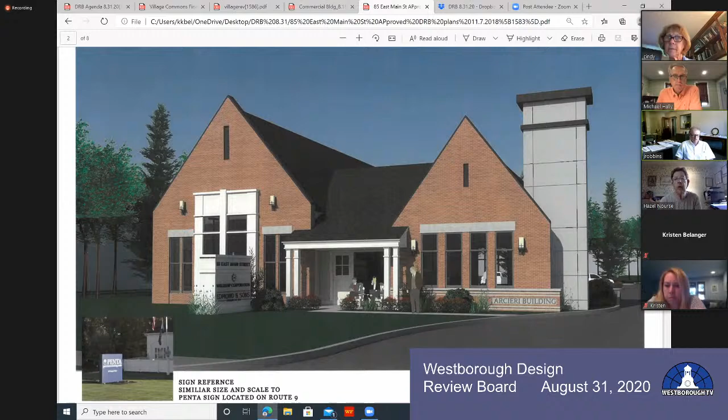Are those the only changes, Jim? No, I don't know, probably Kristen doesn't have my memo. There were multiple changes. I can read them to the board. So we should include them in any motion we make, shouldn't we? It's going to have to list every single one of the changes.

Smook Architects got back to me by email, said they wouldn't be ready for today. I was kind of surprised someone came in after the end of business on Friday and asked to be on the agenda. The agenda is actually closed, but I put them on in advance thinking there might be an opportunity for them to be ready. So I understand Eric Gilmore or someone representing Smook Architects or the engineers wants to speak to the board.

So you're looking at the front elevation. On the front elevation, we're talking about the two louvers in the gabled end. The entryway door you see is a divided light, 1/1 here, 4 lights in the door. The door that was installed is solid, so there are no lights. The trim on the main windows to the left on the elevation are supposed to have white trim between the top transom window and the main windows. In the field, it's actually all brown. The casing is white as shown, but the trim around the windows is brown instead of white.

On the other elevations, on the north elevation, which is facing the woods, there is a similar issue with the trim color not being white, but rather being brown. The last set of windows on the side before the garage, the 2 windows side by side, not that one, the next one to the right, Kristen, that's been replaced with a door that might be for access to a mechanical room. On the elevation above, which is the south elevation, let's see.

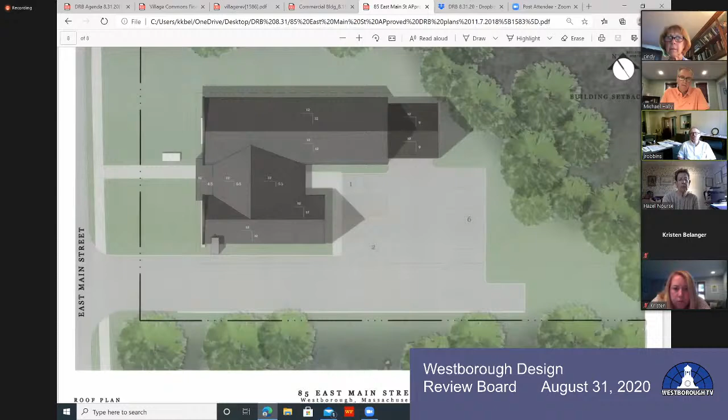elevation, you're going to see when Kristen gets there that there are 2 vents that are supposed to be louvered. They are as shown on the plan right here. So the 2 gabled end vents are solid. They're not louvered as shown in the specification on note number 3.

The trim color is also different on the windows again. These are not major things. They're easily changed on the plan. The windows in the door swap, I'm assuming, is a request of the fire department because it looks like it's a mechanical room. If that's the case, I'm certainly not going to have a problem with that.

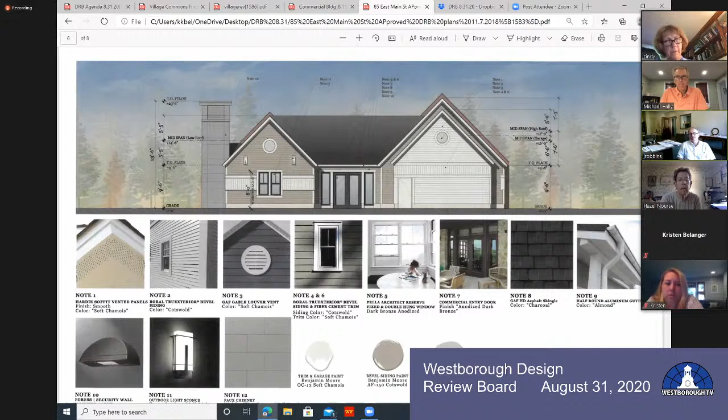Could I say something? This is Lou Amarati from Gilmore Building Company. Yes, please, Lou. On the front door of the building where it shows the residential style half-light door, that actually was replaced with a full light door. It's a door with no panels in it. So it's sort of keeping in line with the big window that's right next to it. I have a picture of it, if Kristen can throw those pictures up that I sent over.

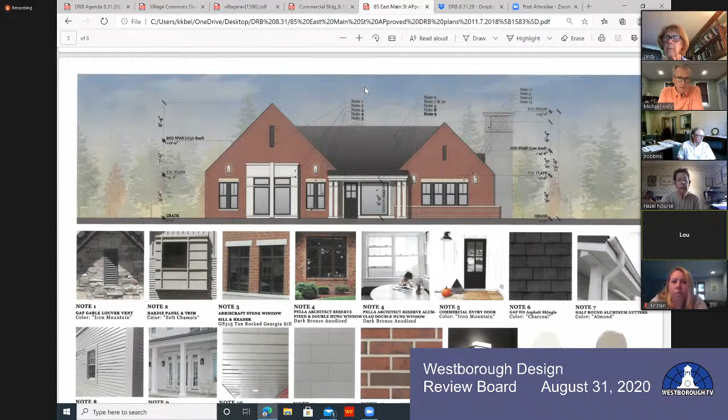I stopped sharing, so you can go ahead. Can you go ahead and share from your end? Okay.

Lou, can you also explain why you made the changes? Yeah. So let me just focus on this, I have a close-up of this as well. So here's the front entrance. And the problem is that we were having a difficult time finding commercial hardware that would work on a residential style door. And when we brought this to the architect's attention, he agreed to allow us to make the change to a door style that was consistent with the other doors on the back side of the building.

So there are no lights, just it's one glass panel, Lou? Full glass panel, yep. And if we take a look at the back of the building, that's the same doors that you see here.

Now, can you see into the building through those doors? You can, yep. I'm a little surprised, actually, for safety's sake, that you would have full glass doors on a commercial building. These doors only enter into a vestibule area. You open up these doors, you enter into a small lobby. On the back of the building, you already have these two big side lights next to the doors. And then on the front of the building, the fact that there's a giant window right next to the door, I don't think really makes much of a difference in terms of having the front door be a partial or a solid panel door from a security standpoint.

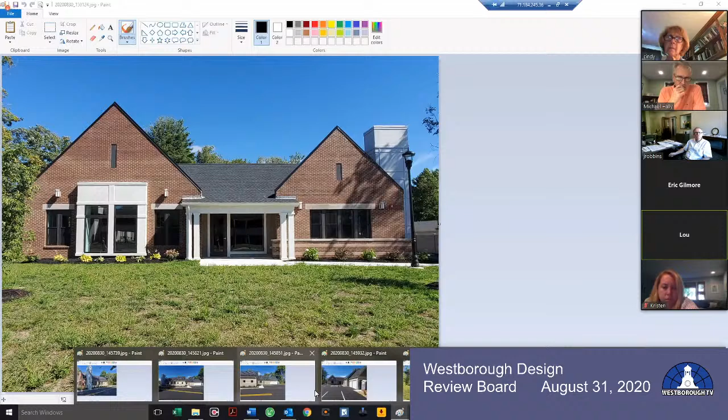Lou, can you explain why the doors were substituted in place of the windows? There actually was only one door that was replacing a window, and that was right here. On the other side of the building, let me get to it—there were no windows that were replaced with doors on this side. Okay, my mistake, you're correct. So the one door we did have to put in here was deemed a requirement for egress purposes when the interior of the building was finally designed.

Why the change in the window next to the door, to the left of the door? Right here? Yes. If you look at the elevation that was approved, they're double hung windows similar to the other side of the elevation—if you can show the elevation. That was for a utility room to go in there. I thought so, okay. Yeah.

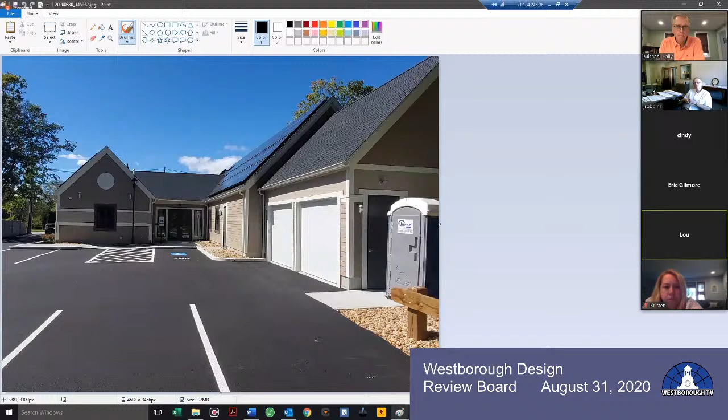And the door on the rear of the building where the porta potty is—is that because building code requires a door outside the garage? That's right. So for the board's information, on the original approved elevation for the rear, there was no door where the porta potty is, but I understand building code required it. And then further down to the left of the garage door, you can see the second means of egress that was required.

Why the removal of the louvers, or the different door on the garage? The garage doors themselves, yeah. Well, this is where a potential security issue did come to mind. With having glass windows in the garage doors, the building owner felt it was more appropriate that they be solid doors rather than have glass in them.

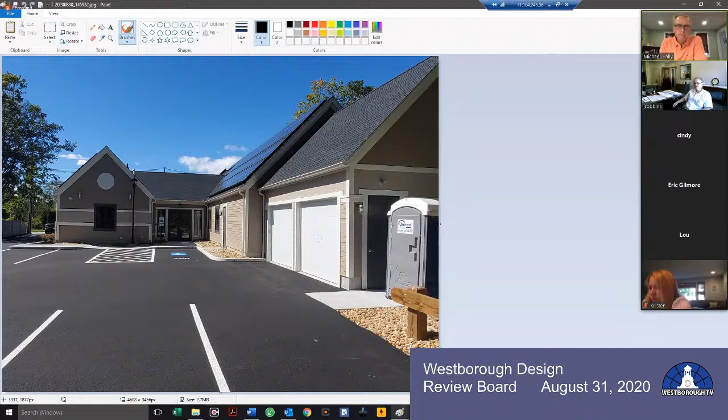Are those doors panelized, or are they just flat? Whoops, there we go—can you see that a little better? Yeah, they're flat panel doors. And they're a different color. The design drawings had a brownish neutral color, and they were panelized. Is that accurate? Yeah, they looked like a carriage house style door.

Lou, the design review regulations are trying to make buildings in this district look residential because this is the gateway district. I recognize the purpose is for commercial use, but the design is intended to be a transition between residential and commercial as you enter downtown. Across the street, the doctors' offices and the hair salon are all residential in nature, so most of these changes made to this building were commercial changes. The board needs to recognize that when they approve these. In the future, let your architect know, and I'm letting you know, Lou, that you can't make these changes in the field without pre-approval by the design review board.

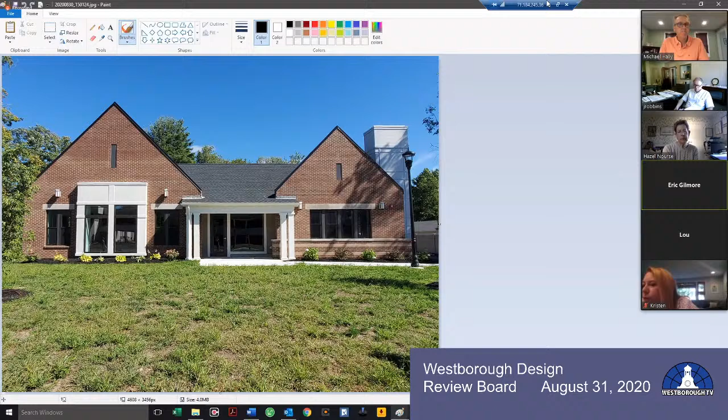Through the chairman, Jamal just texted me and said he waited till 9 o'clock. He had to go to another meeting, so he left. But he said if you need him, he will be back after 9:30. Okay, if you need him. Keep going, and we'll make a list for him if we have questions. Okay, perfect, that's fine.

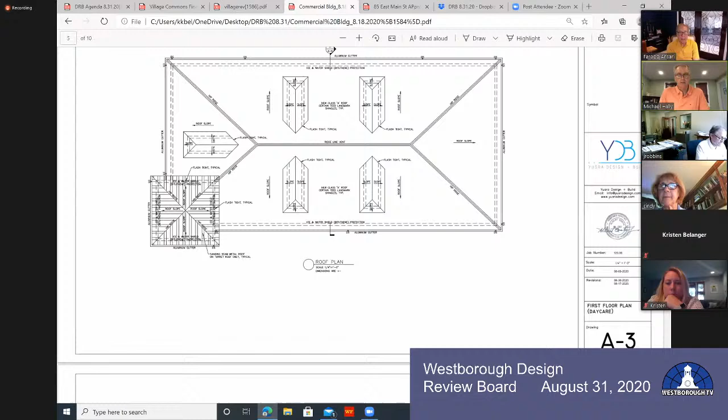What do we want to talk about first? You want to talk about the commercial building? Let's do the commercial building first, then the garage or summer house, and then the residential.

Is it my turn to speak? Yes, please, Farouk. The last direction you gave to Jamal was to give the stone lining at the bottom of the building all the way around rather than just the 2 sides, and also all the way down to the grade. That was the only comment. So he did do that. It's all on 4 sides now.

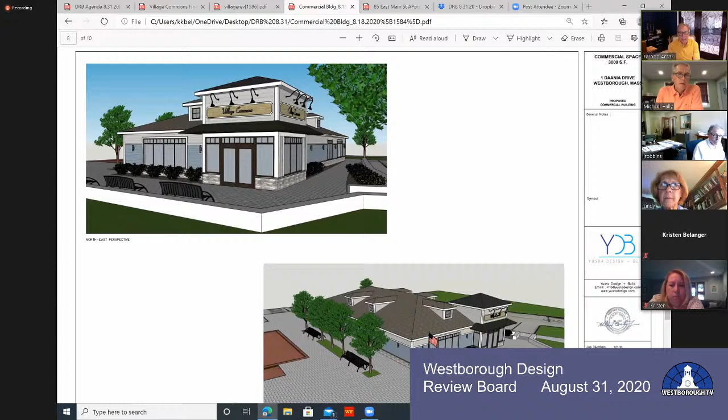If you show that, the MP4. And we have the 2 sidings as we discussed before. Yes, you can see clearly they got 2 different sidings there. Okay.

You can't run the video, huh? The MP4? I saw the last video, Farouk, it was very nice. Okay, thank you. We did see it. Did we also add the lights along the building? I don't remember those, I like those. Yep, I think somebody must have told him, and he did add that, and also provided the cut sheet for the loop awning lights.

So it's complete. Anybody, Hazel or Cindy? If we approve this building as such, are we also approving the sign, or can that come later? I assume that's a placeholder. The lights we are approving, but not the sign. Okay, thank you, that's your intention, Farouk, correct? That is correct. It's just to show where the sign will go, but we don't know what that's going to be. Yeah, I like the lights. They'd have to come back for the signage. Okay, correct, thank you.

And can we see the spec on the lights? Is that close by, Kristen? One second, Michael. For the record, Kristen, would you note that Farouk acknowledged he needed to come back for the sign? Yes.

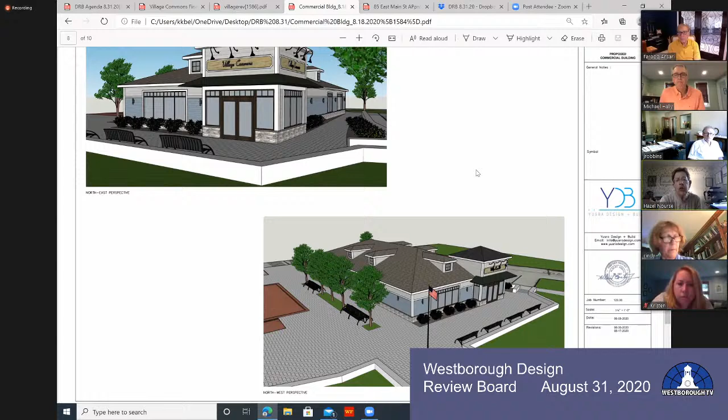Jim, is it worthwhile, I mean, one of the problems we've had all the way along is that the architectural renderings don't look like what the buildings end up looking like. And then the contractor comes in, sometimes looks at the architectural renderings, fails to look at the plans themselves. This is where we seem to have had a disconnect. Is there some way we can do something about that? Because that was the problem we had all the way along.

Sure, so the board approves plans that are dated and each plan sheet is numbered. The renderings are not— I take that back, the renderings are numbered, but we're not approving the renderings. You can make it specific in your vote that you're approving the plan specifications dated and numbered the following. And when you get to that point, I'll do a motion for you. Okay, so that's thank you.

But it's Farouk's responsibility to either be a project manager or get a project manager that makes this clear to the builder, to the contractor. It's totally Farouk's responsibility. The buck stops with him. Right.

But that's the problem we had with the residential. So many times we had those renderings and they were not connected to the plans. That's because he built the color rendering, he didn't build the specifications. I don't even know, Farouk, if you knew you had specifications, but it was your responsibility to get those from the developer who had them approved.

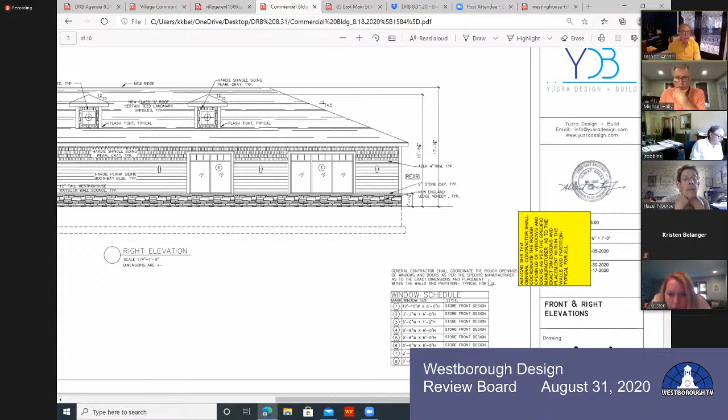We need a spec. No, the manufacturer is United, it says it on the elevation. Where? If you go in front of it, it says- I just saw that, I just read it. Can you move it? Doesn't that say it in the plans? No, in the plans I'm saying it does say that. It says fixed window by United, typical. Yeah, right there.

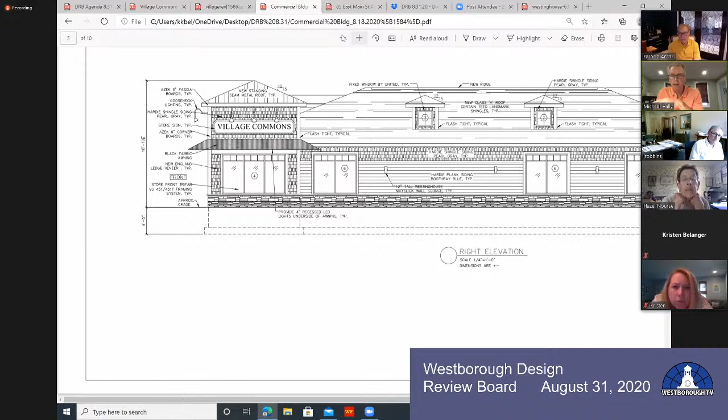If you have it... You see that, fixed window by United? Yeah, but it doesn't have... if you don't have it in the specs, we don't know the size of it. There's nothing there that tells us. It can go to the specs, please. The window schedule gives us the size, and the callout says window. Okay, it gives the size.

See, it's fixed, number 7, 2 feet 4 inches by 2 feet 4 inches square. And do the lower windows?

I know the storefront windows on the lower level, are those all by United, or is that different? No, those are by different people. The specs are all given. I had provided that earlier, and I think it's on here too.

We need one set of plans, Farouk. No, this is all there. See the storefront design, that's the name of the company that does that.

Kristen, can you move the drawing to the left a little? I think there's a callout at the windows below the Village Commons tower. It's all there. Storefront. Yes, right there. All the specifications are given, the manufacturer is given, everything is given.

And I assume all the window frames are black, is that correct? Correct. Is that called out someplace? They only come in black. Well, then you better tell us that they're black. I thought it said there somewhere. It was black, I think shown in the rendering too. It's the rendering though that we're not paying attention to. Yeah, that's okay, I'll ask Jamal. Maybe he has added it somewhere. If not, then we can put the word black there.

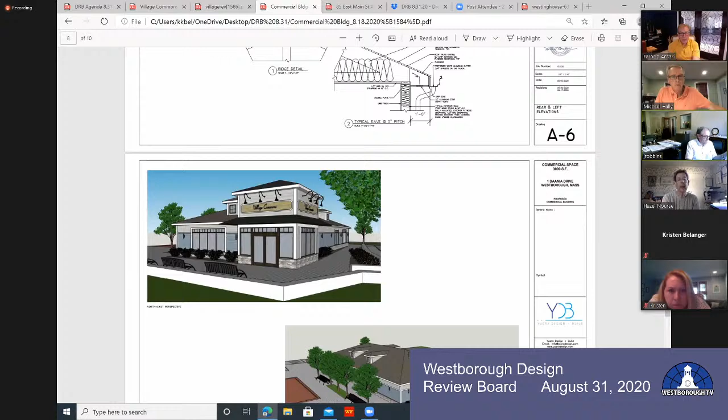Can we just go to that other light we just were showing to Mike? I don't think we've ever seen anything about the lights, Michael, have we? I don't know, I've seen it, I can't remember, I've seen the goosenecks a lot. I thought it was in the last package. Yes, it was, yes it was. So, oh, you want to see the side lights, Jim?

Is that what you asked for? Yeah, we just saw that a minute ago. Yeah, it was, we had a cut sheet. Where'd that go, Kristen, is that in there somewhere? So I see a Mayslick light. Yeah, there we go, right here. Yep, okay. Do you have the same for the gooseneck?

Yes, same exact sheet but a different kind of light. But I'm looking at my phone here to see if I get it. That was submitted earlier, the one before this that was given as a separate thing. Okay, no more separate submissions, we need one set of plans.

Yeah, grief. Is there another light below the awnings? Is there something? Yes, there was also submitted. Okay, I'm looking.

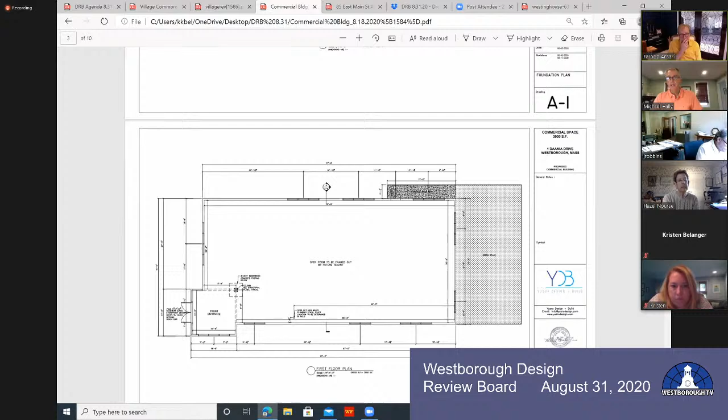All right, as soon as I get the file in my email, I'll pull it up. What did you want to see, Hazel, in the meantime? Oh, that's fine, I just wanted to go back to these so I could look at these again. Okay, not a problem, all right, as soon as they come in my inbox, I'll pull up those specs for the gooseneck.

And there was a third type of light, is that correct Michael? Is there a third type? Yeah, so there's a light under the awning, the fabric awning at the tower, I believe. Right. So we should have the specs for that also. Yes, that was also submitted.

Where is this submittal? I don't have a paper copy. I sent that to Kristen. This was sent earlier in the process. Okay, so I have a file on the network with this that I could print out.

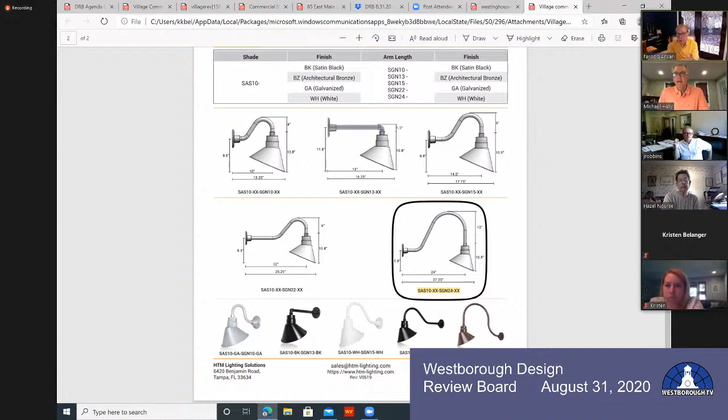Well, the only thing that's lacking is this number is not specified on the new plan, right? But otherwise, everything she's spec'd it all out. Yeah, just on that sheet, correct, that's the spec right there. So what we're telling you, that's a problem, it has to be extremely specific. I don't know if he has even put that down in there or not.

Was there any spec for the other light, Michael, the one under the awning? We haven't seen anything on that yet. Yeah, there's a picture of that too. There's a cut sheet of that too. Was that in a previous submittal? Yes, it was the one before this one.

We need one set of plans. You may think it's redundant, but we need one set of plans, because when the inspector goes in the field, whether it's me or Bill or Fred, they need to know what they're looking at. They're going to take one set of plans.

Let me, so Kristen, is it easy for you to look in that last submittal where the gooseneck spec was? That looked like one email, so she's probably going to have to go back through her emails to see that she can figure out which one it was.

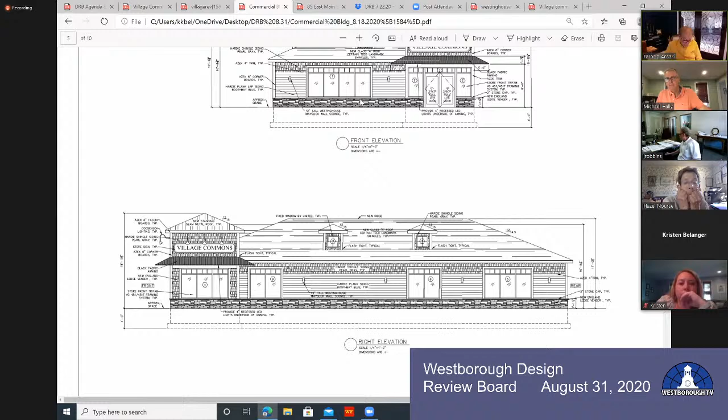Okay, when something says on those plans, 'flash tight typical' - Michael, what does that mean? It means that they're all the same, assuming a spec is listed somewhere on the plans.

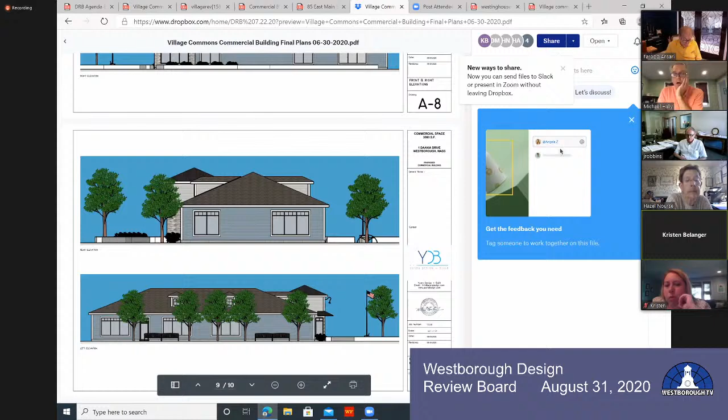We don't have them as part of this commercial building file. I just texted him to send it to me again. So that light, I assume, is an LED of some sort - yes, it is. It's a round puck light, they call it puck lights. Okay, yeah, that's what was submitted.

Okay, let's get this commercial building - I think if I can speak for the board, we're generally pleased with the finishes and textures and the light. As soon as we have the lighting specs and get the specs clearer on the windows, the black finish, I think we're pretty good on this.

I'm not sure if you listed the color of the standing seam metal roof on this - it doesn't give us a color. Colors are just as important as the manufacturer. Even the wall lights, I'm not sure they say black on them. All the colors on the lights and the light specs are just as important. But I think the stone looks good, all the trim looks good, and we need it all wrapped up. We can't give you approval till it's wrapped up.

Michael, on the plan we're looking at, the front elevation just says 'new standing seam metal roof type.' Aren't those the kinds of things that have to be specific as to what they are on the plans? Is that correct? That is correct. So we need the manufacturer on that, and certainly the color. We know it's standing seam, and so that would be...

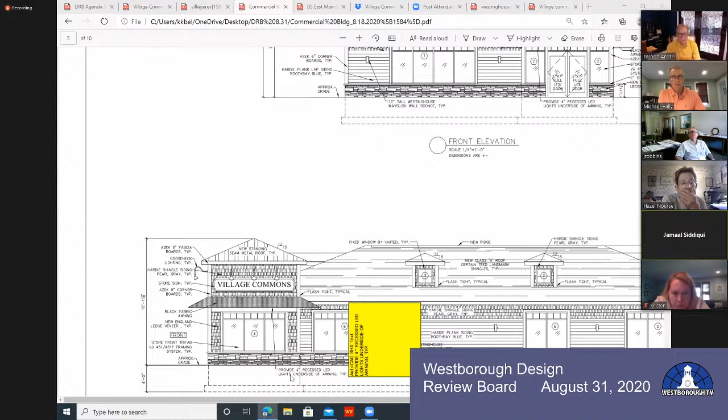If you go to the other drawing sheet, I'm pretty sure I sent all the specification sheets for all the lighting. Which sheet is that, Jamaal? If you look up... but also the siding color is called out there. Yep, siding, we found it. Great, and then the gooseneck. Oh, we're moving too fast.

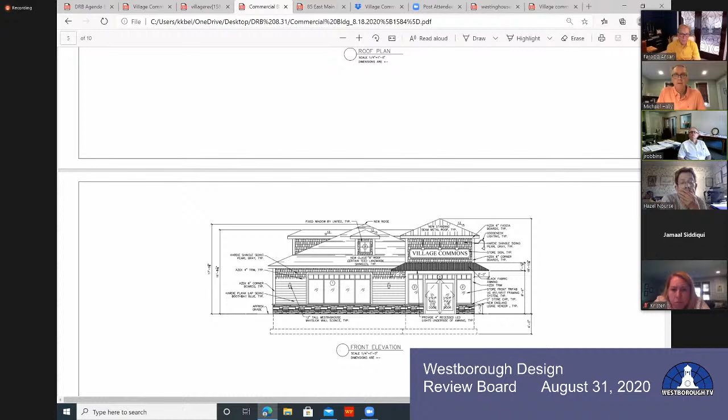All the specifications were sent to Farooq, and I just re-emailed them again. Okay, so it needs to be on the drawing.

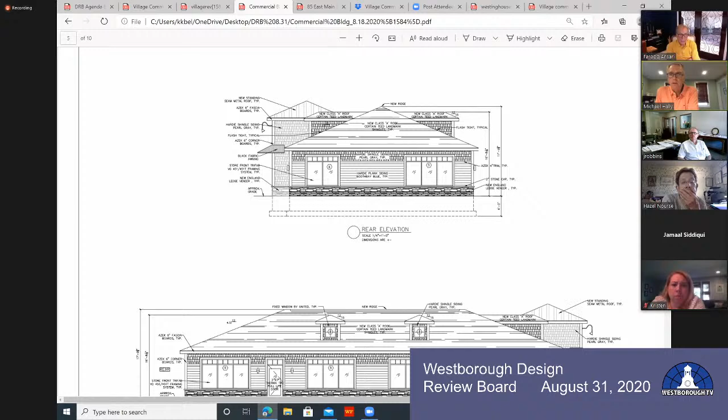This is the drawing that's going to make its way into the construction sets that the subcontractors will use, and it's also the drawing we approved. So Jim or somebody else can be in the field and look at this drawing and say, yes, the goosenecks are 24 inches and they're black, per the drawing.

Jamaal, you did send a cut sheet with the number you spec'd out, but the design review board wants that number specified on the plan. He said SAS number, we found the gooseneck spec cut sheet, but it's not specified on the plan. They just want that number on the plan. Sure, and the color.

So again, we see the sconce lights on the building, happy with them, just has to be buttoned up on the drawing. We've seen the goosenecks from an old submission, that has to be on the drawing. And again, whatever lights you're using under that canopy needs to be on the drawing as well. The puck lights - he had sent me the cut sheet, but it wasn't in the other submittal.

Well, this has got to be placed on this one. Okay. That's it, right?

Yep, we have the stone called out - New England ledge. We've got the Hardie board siding called out, and the AZEK trim.

So on the window schedule, if you could include maybe the manufacturer and the color of the extrusion too, Jamaal, that would probably help everybody.

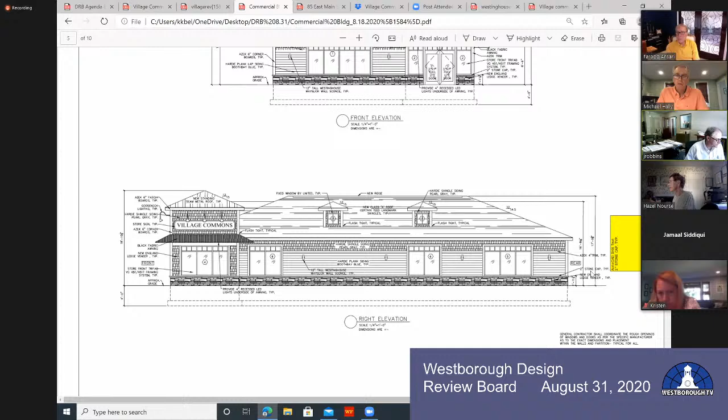Last question on the doors, again on A4, on the top elevation in the front entrance, it says full light door. Is there a specification for that? Manufacturer, size? It's the same manufacturer as the windows, the fixed one, so it's tri-fab. It's a door that comes from the storefront manufacturer. Okay, so could it say storefront door? Sure. There's a note right to the right where it says storefront tri-fab system.

Okay, so the door is integral to that storefront? Correct, yeah, it's all one piece, I think. It's a fixed piece is my guess. Jamaal, could it all come from the same manufacturer? It's a storefront company, similar to Century Glass and whatnot. They manufacture that and they come and install it. Typically, Jamaal, the door comes to us as a separate spec. Again, if there's a cut sheet available for that specific composite, that the doors and windows, that would be very useful.

That, the doors and the windows, that would be very useful. Yeah, I had that cut sheet. I supplied that in the very first submittal, but we'll add that in notes. Okay, put it in the next submittal, please.

Now, maybe Jamaal, you might want to put that arrow to the door also. You're only showing towards the window. So if you have that same thing on the door too, that will cover that storefront tri-fab. Yep. Why don't you send me those cut sheets? I have them, I will send that to you.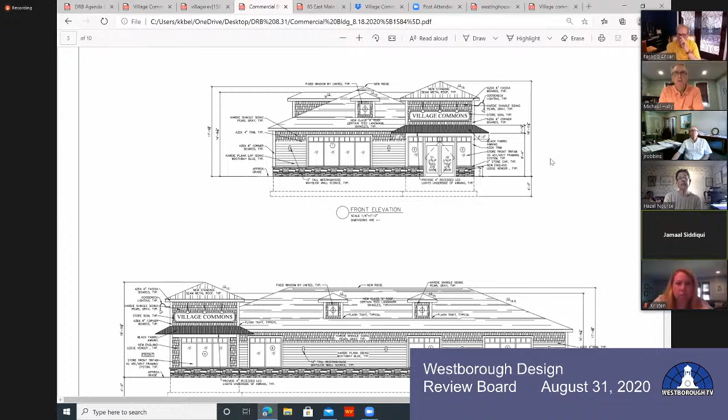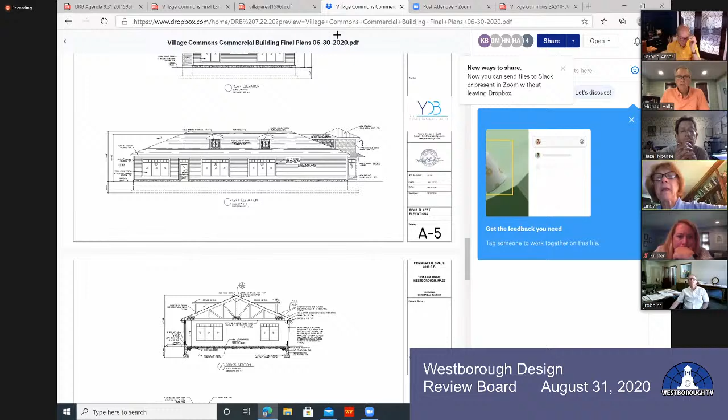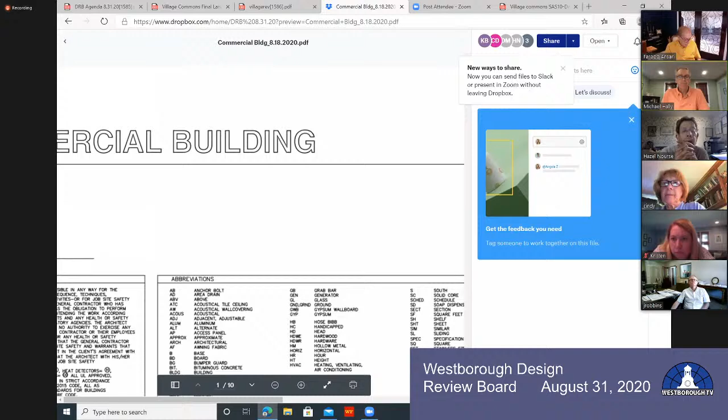On the drawing labeled A2 of this set, in the back, it shows a big area described as green space in the commercial building. I guess my question is if Farooq could explain again what that green space area is supposed to be, because it didn't match up with what I thought the landscaping around the building was.

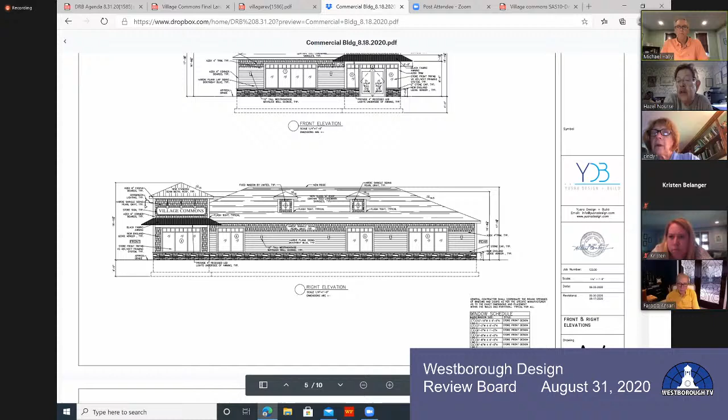I'm sorry Cindy, what sheet was that? A2-8. My suggestion was that we hold off on the landscaping. We had some questions about how that was going to work with the rest. At this point, I would just like if we could deal with the building and deal with the landscape and the area around it at a later time.

Because I think we had some questions about it. Cindy, we talked about it, we had some questions about how that actually was going to work. I think we're going to wait until we at least got the building organized before we deal with the landscape. So Farooq, if you can look at this specific plan that's mentioned here, and again nothing extraneous on this, hopefully this is consistent with the landscaping plan on these areas. Green space, I can't read it, but just make sure you check that out.

And to Hazel's point, you need to triple check the landscaping plan. I don't know if you have someone helping you with the landscaping plan, if they want to be on the next call. This landscaping plan was developed by Waterman Design and approved by the DRB in 2015, and that hasn't changed at all. It's the same exact plan.

Okay, so these things on the plan that were on this sheet A2, those rectangles that are shaded, do those match up with the landscaping plan? Yes, they do match up with that. I think he just put that in to complete it.

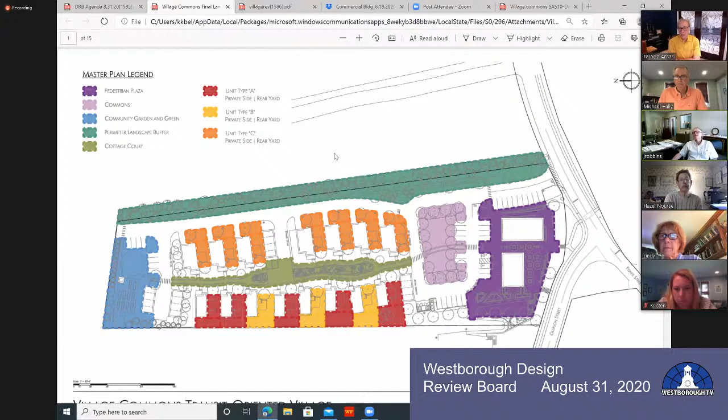This was the one that was approved years ago. So do you know what you're building for the purple area? Yeah, if you go further down, this is just a rendering of it. Keep going down and you will see that. See, now comes the plants. Go further down, keep going, it's all there.

I see all that. So the design review board needs to approve that. That was submitted, that was not approved. Now, that doesn't mean they won't approve it. I think it was well thought out by Waterman Design. But the design review board needs to approve that because that's all associated with two commercial buildings.

I did not know if it was approved or not, but I thought I was told it was all approved, the landscaping plan. So the plan that you just got approved is not reflected in this design, because these footprints are very different from what you just got approved, I'm sorry, from what the board is reviewing right now. Okay, keep going down, and the only difference is that turret, that they added the turret later. So other than that, it's the same exact footprint.

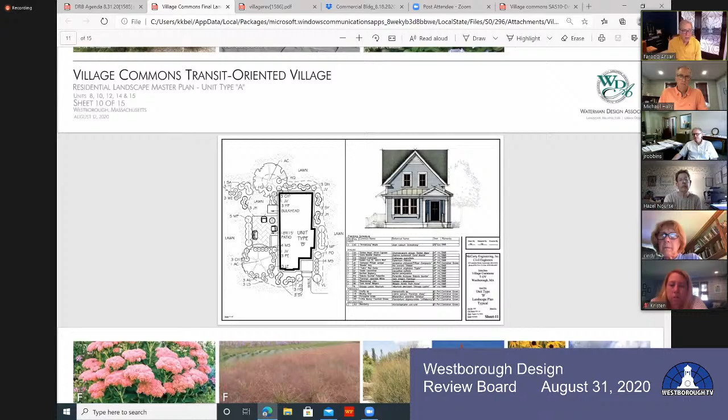So see, these are all the details of the plants and the plantings. This came from way back when, but I asked them to change the date on it, so you would have it all under one date. So it's all there. So when did they change the date, what is the new date? Just August 12th.

Okay, so we had this discussion last meeting, and what we had asked was we wanted the location of the turret shown on the landscape. Yes, there is a sheet submitted, on a site plan that's shown too. Yeah, but we wanted it on the landscaping plan. So if this is the plan you're submitting for us to approve, we need that box changed for the orientation.

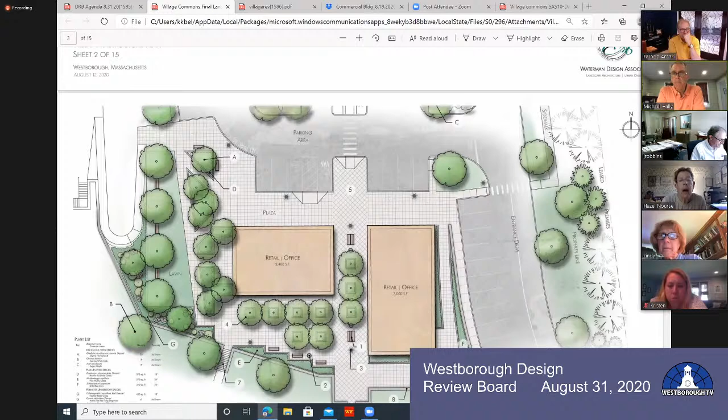And again, there's lots of information here and it looks pretty good, but I think we were looking for an updated full landscaping plan. If I could recommend through Michael, through the chair, that Farooq, you go back to Waterman Design and have them contact us with new plans.

I mean, this shows two buildings too. We have one building we're dealing with. Well, the second one has got to be built later on, but it's there. It was approved by the planning board, but I'm only building one building right now. What are you going to do where that building is going to go eventually?

Well, we can have up to 9,000 square feet in total. That building could be 6,000 square feet. I'll have to see how, it doesn't need to be done till almost the end of the project. I think it's like after 13th or 14th occupancy. So it gives me a little chance to see where the things are.

The commercial usage right now is dead in Westborough. So when this new building we're looking at today is finished, what will be where this box is shown, this second building? What will be there? It would be just nothing but dirt. Dirt? Yeah.

I would have to come in front of you to show you the rendering of that, the architectural plans of that, which I think very highly likely will be very much identical to the first one. Yeah, doesn't have to be, but I understand. So again, given the current economic situation out there, maybe something other than dirt needs to be in that place. I don't know, because it could be a while. Yeah, well, no, I don't know that yet, but we have a little bit of time for that. We could just grade it out and put some loam down and grow grass on it.

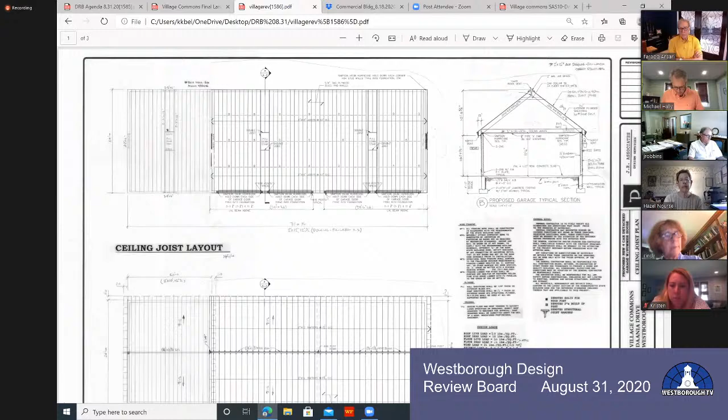Okay, so we added windows here. We've got the French door on the gable end. All right, and do we have call outs? Kristen, can you zoom in? Probably on the two bottom. Well, okay, that's good. I don't see any call out on the windows.

They're all United windows. Well, I know, but the metal roof doesn't tell us what color that is. It says it's galvanized, 24-gauge shingles, metal panels. You see that on the top right-hand corner? What color are the metal panels? Galvalume is the color. I think Galvalume, it's like tin or galvanized metal.

All right, and you got the CertainTeed call out there. Yes, driftwood, with the color specified. All right, and siding. What's that note say down below there? The color herringbone, straight edge, it's all there. Cedar impressions, your impression, so it's vinyl. All right.

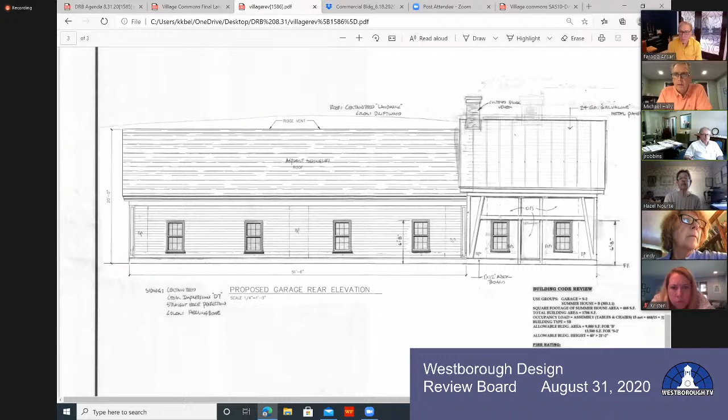Roof is there, the siding is there, it's all there. All right. Jim, is it all there for what you need? Probably, I think we got to look on that. Are we staying with the stucco? Yes. All right, Kristen, can you kind of push the drawing? There you go. I'm looking for a call out on the stucco siding color.

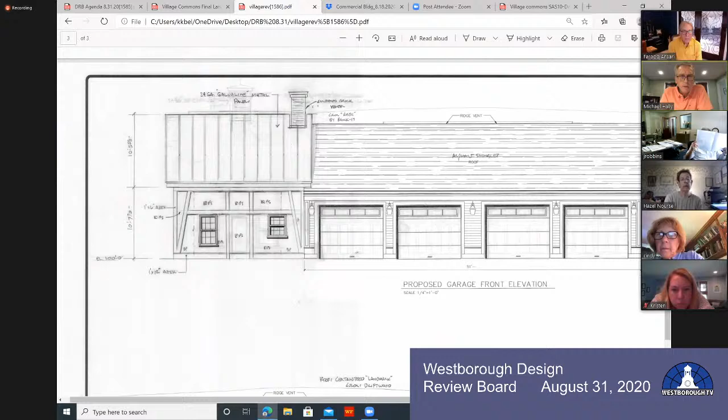12-inch AZEK. The color of the brick is given there too. I see that, rustic. Right. All right, so we're looking for those purlins, they're 12-inch AZEK. I assume those are going to be white. Yes. All right, and I'm looking for, are there callouts on the plan for windows anywhere or elevations? We don't see that. They're all just white.

If you've already built this garage, a four-car garage has already been built, so it's identical to that.

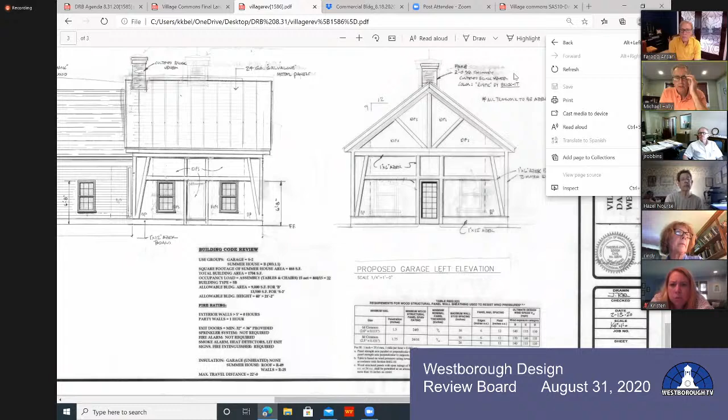All right, so Kristen, can you give us the plan? See the plan view of this summer house someplace? There it is, it's foundation right there. Can you scroll down just a little more, please? Yeah, so you don't have any window callouts. You have a size W2442, typical, but there's no note on that.

Is that a Harvey window? What is that? It's United. Okay, throughout the whole project it's United. So, I know you've already built the garage, but we need the spec sheet attached to this drawing for those windows, and a call out on the drawing that they are United windows and the color.

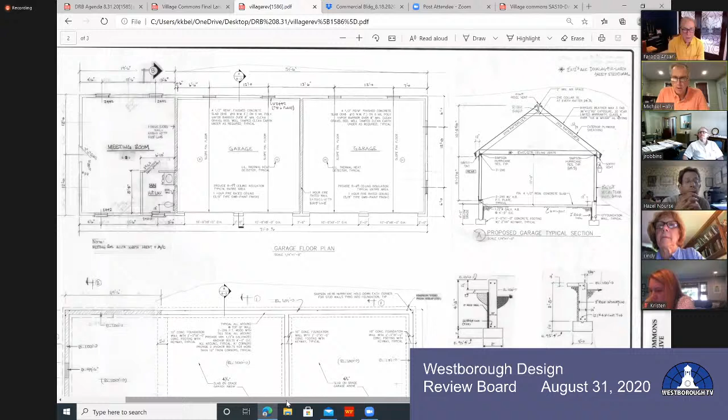And then call out the white AZEK, that the AZEK's going to remain white. And again, I didn't see the call out for stucco and the color of the stucco. It's off-white, that's what we had talked about the last time. I could put that on, the off-white. It doesn't say that though. That I saw, but anyway, so it's got to be on there.

Is Jamal doing this also, Farooq? No, there's another gentleman that's doing it. Okay, and then what do we got for lighting on this?

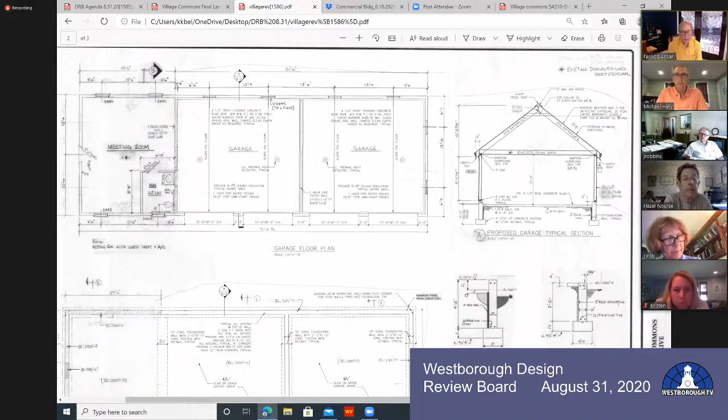It's all the interior lighting, and the garage door lights, the same as the one that we already built. Okay, but if you look at the doors, you'll see that. If you look at the side elevation. Approved. Is there a light at the door on this summer house?

In the front, you mean? Yeah. No, nothing is shown. Okay, well there should be, I think you're gonna need a light.

Lawsuits are expensive. Oh, there should be a light. Is there a back door and a front door, isn't there? Nope, there's one door. We talked to Bill Heslett, I think, about this last time or the time before, that we only need one means of egress. Okay, well then it obviously needs a light.

Yeah, so I think you gotta put, I don't know, again I'm just guessing, maybe you'd reuse a smaller version of the garage lanterns or something for it. Yeah, I think we're just gonna use the same lantern in the front of it. Okay, so you gotta show it in a position on the elevations and a call out.

Okay, fine. All right, does anybody see anything else that this plan needs to address? What's the color of the AZEK? It just says white. Yeah, he's gonna put in white. Okay, you're gonna put in white. And the stucco is gonna be white. What color is stucco? Off-white. He's gonna write in off-white.

What is the note where the stucco is? I can't even read it. It said EIFS, that's a short form for stucco. Okay, it's shown everywhere.

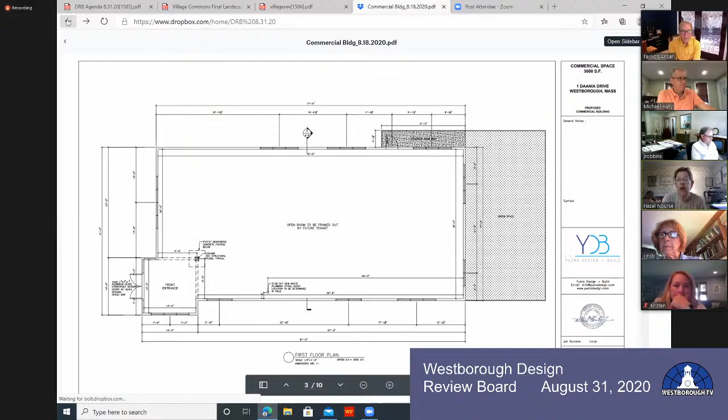If Jim could just give us a little discussion about the fact, I know he went out and looked at these and there are certain changes that need to be made in them. I'm wondering if Jim just gives us an overview of the changes that need to be made in the plans, so we don't spend an hour going over these ourselves until we get the plans as they're supposed to be. Fair enough. Jim, would you like to comment?

Sure, can I say something real quick? I believe on Friday, late in the day, is when Farooq sent over revised elevations with the changes Jim had requested. So what we have on the screen should have the changes that Jim found reflected.

So are these the plans on the screen, Kristen, that I found on my chair this morning? Well, I can't remember timing wise when we got the revised plans from Farooq, if I had enough time to print those out or not. But what I have in this file is what I received at the last minute on Friday. It says at the top, Village Commons, type A plans, August 10th.

I mean, until I've had a chance to look at the plans and digest them, I just can't sit here for an hour and go through these piece by piece again.

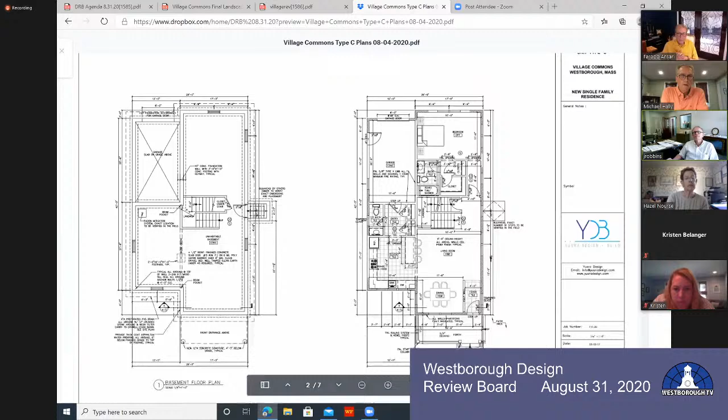Okay, when I was in the field, the front elevation had a door with panels and a side light, which now I see is on the plans, so that reflects what's in the field. We also had a carriage light aside the door, which I think is necessary, and I now see it on the plan. It wasn't on the previous plan.

Is there a spec for that light, Farouk? No, those are just the lights, there's no specs on that. Are you going to carry that forward? People buy those lights and bring them in. Well, we just want to make sure that all the houses are the same. So, was there an approved fixture earlier, way back? No.

I'll make sure they're all the same, that's all. So why don't you submit us a spec on that light then so that we know what they are? Okay, the right side elevation is okay.

Are you showing the stairs down, two stairs down, from the porch to the side patio? Yes, you can see that, they're there. Okay, they weren't on the first plan, but they're there now.

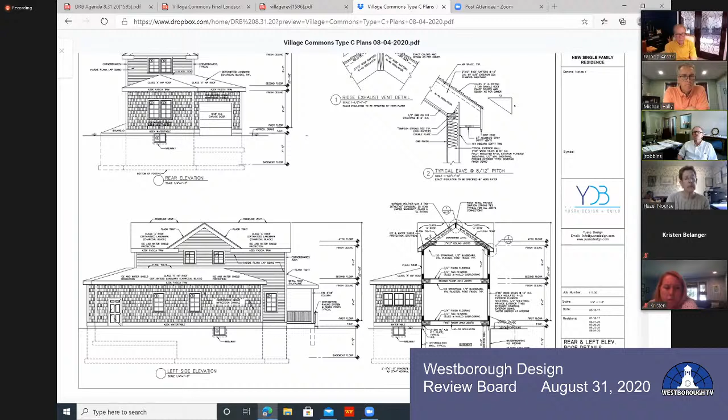It looks like the one on the left is a little smaller, but as long as they're double hung 2/2. Your note says that they are two different windows - we have a number 3 and a number 2. So Farouk, are you going to install two different windows on that side?

Yeah, the same. Well, they're called out as different on your plan, and one's a number 3 and one's a number 2. Can you expand that a little bit, please?

I think that's probably a typo. They're all the same. No, they're both the same, identical.

That was the whole thing the last time when we had this conversation with the DRB. They wanted the two windows to be the same, so I took the old one out and installed the new one. I think it's just a typo. No, I think you just didn't change it.

So Farouk, if I'm a contractor and you don't fix the typo, am I going to know what to do? Yeah, they should be both the same windows. They are the same, all 3 of them are the same. 2, 2, and 2. Okay, let me...

Actually, the 3 came from before, it used to be a 3. It's a 2 now. I can correct that.

Yeah, because on your plan, there is a distinction between the 3s and the 2s. Right, right. Okay, and they're shown on this plan. The one on the left is a 2, the one on the right is a 3. They're just slightly different in size.

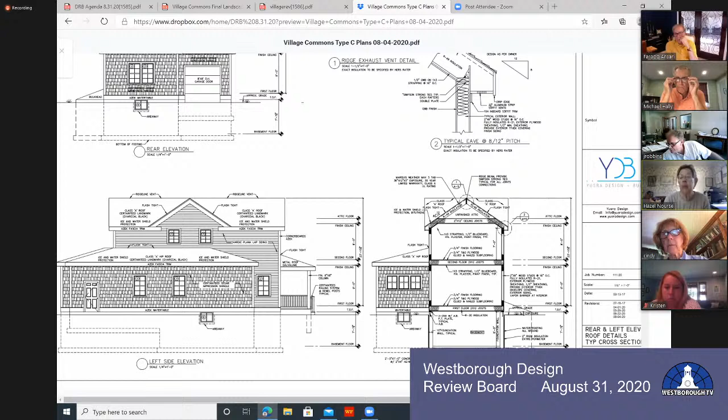And I also would just like to make the comment to Farouk, I hope he's not planting now, because this is the worst possible time of year to be putting any landscaping in. It'll just die.

Okay, so do we need to vote on this, Jim? What's our action? Ask another question. Yes, Mike? Sorry, the type C, I believe, has the balcony - is that type C?

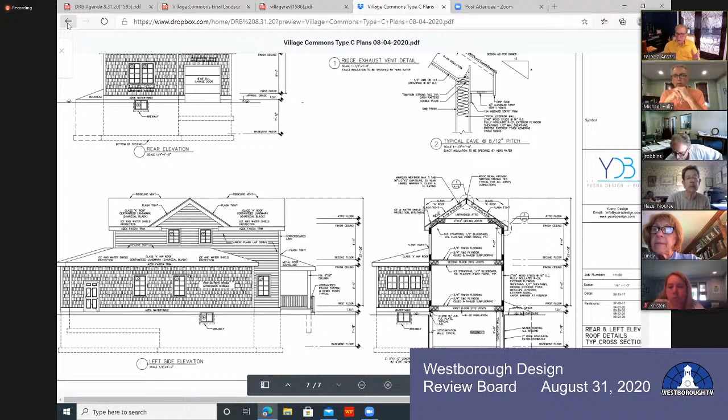No, it doesn't. Type A has it. Is there one already built or occupied that does not have the balcony, and is that the way it's going to remain? Farouk, all houses will be consistent - the one that's occupied has the balcony, and all the rest will have them too, so there's no discrepancy. But that's type A, isn't it? That is type A. Okay.

So you're going to add balconies to the ones that don't have them now? Well, they're not even built yet, so yes. Okay.

So Jim, do we need to approve these? Is that the short of this? Yes, and make sure in your approval you mention the new date, which looks like 5/3/17, revised 5/11/19, and 8/10/20. If you'll give me a moment, I'll talk to Farouk about his landscape plan and type you a vote out for these - this is just for the elevations, just for the homes, not for the landscaping.

Agreed. All right, you guys go ahead, I'll type you something quick. All right, landscaping.

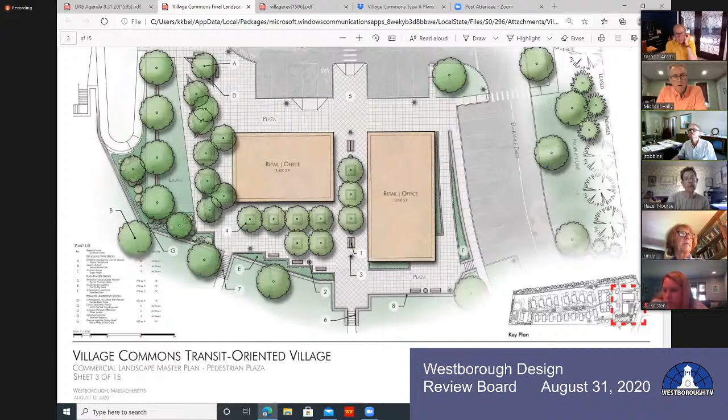Yeah, go to C. The other plans, yeah. That's the first one, yeah.

Can I say something, Mr. Chairman? Yes, please. Based on the instructions given to me by Jim and the DRB, they wanted all landscaping plans in one folder, both residential and commercial. So I replaced the new landscaping plans based on the approved elevations to reflect that.

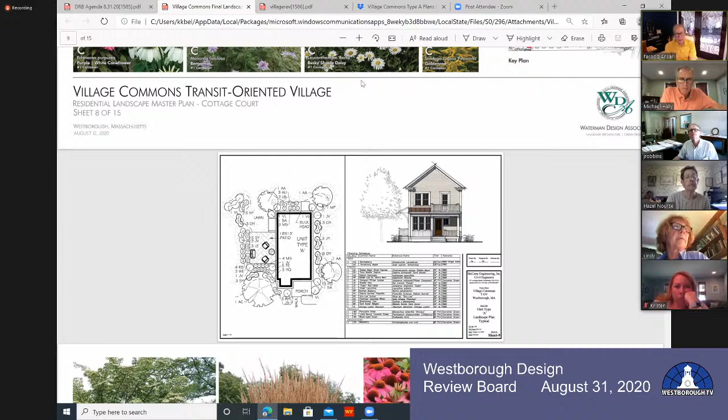Right here is for type A. If you look at them, they're shown with the patio, and the patio dimensions are all the same - every single one has the same size patio, 18 by 15. And if you go to sheet number 11, this is for type B and its landscaping plan. Then sheet 13 is for type C.

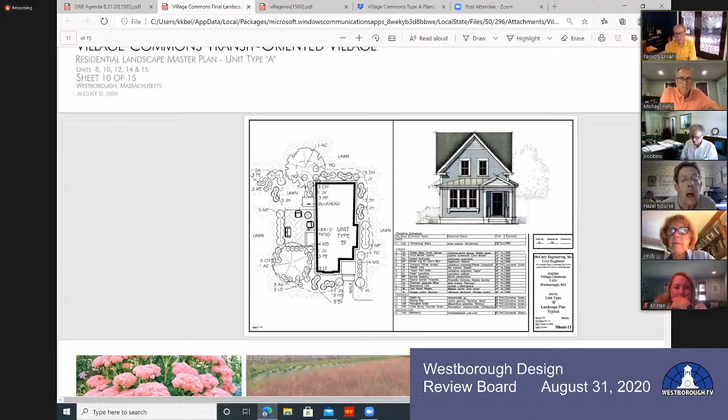Wait, that one said the patio's 18 by 15 - I thought the preceding one was 18 by 11. Can we go back? It's 18 by 15. Oh, sorry, okay. I apologize, they're all 18 by 15. Yeah, that's for type C.

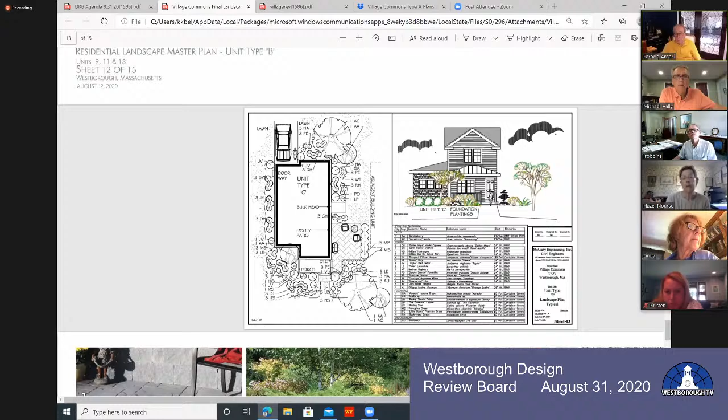And these are dated when, Farouk? These are the latest ones. There should be a date on it - it said July 29th. Oh, August 12th. August 12th, okay.

All right, and any comments from the board about this specific, the C plan? Does this look like our expectation?

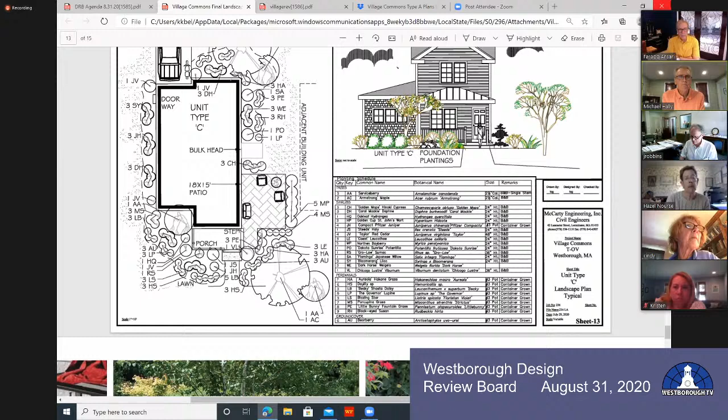I have to say I am concerned about the landscaping plans. Between the edge of the patio and the adjacent unit, it looks to me like he has trees there, and I don't think there's going to be enough space. I am concerned that this landscaping plan is not really going to work because of the space now that things have been built. I would feel more comfortable - who did these originally? Whoever did these originally should go out and look, because I don't think there's enough space between the edge of this patio and the adjacent building to put in the type of landscaping shown in this picture.

And have these things live. Specifically, it says 5 MP - those are bayberry, is that what I'm looking at? What are those? MP - Northern Bayberry, it looks like 24.

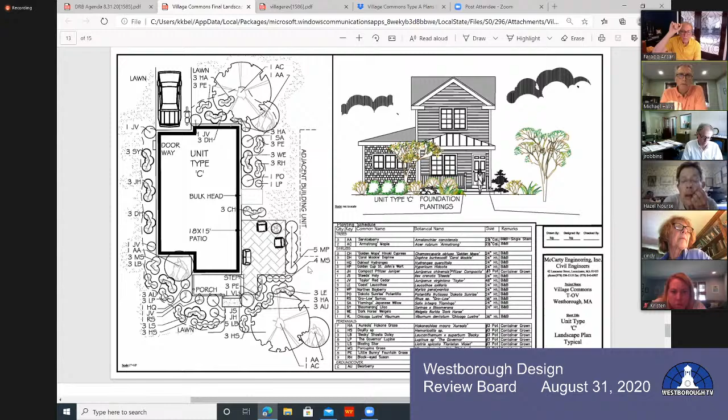Is there a picture in this package of what - Farouk, do you have a comment? Yes, just to keep the board apprised, I planted all the plants for this particular unit as an experiment, and Jim was out there looking at it. We only did one house. In my opinion, as I stated to the board earlier, this landscaping plan is way too congested for the small houses they have.

I mean, you come look at it, it's way too many shrubs. One house is complete as an experiment, and Jim was there and he shared the view that we're discussing here, exactly what Hazel just said. I think it may not be a bad idea for my landscape guy to come and meet with Jim on the spot, if Jim has the time, and work out a plan that's practical.

This is not a practical plan at all - there's no space for people to move around, it's full of plants everywhere. So I'm not afraid of doing them, but I don't think practicality governs that. So if Jim, being a gardener, meets with my landscaping guy, he could probably thin them down a little bit for the next ones, because next month I'm planning on putting in landscaping - end of September would be a good time to do the planting.